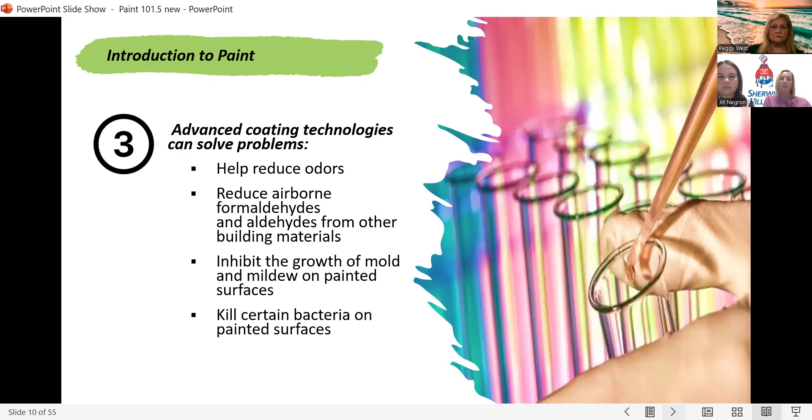So for the substrate, some examples of different substrates are gypsum board, wood, concrete, CMU, ferrous metal, as well as aluminum. And then we want to know what condition it's in. Maybe it's new metal, or it's new drywall, or if it's been previously painted. Sometimes it's in rusted condition, or it's in great condition and you just want to change the color.

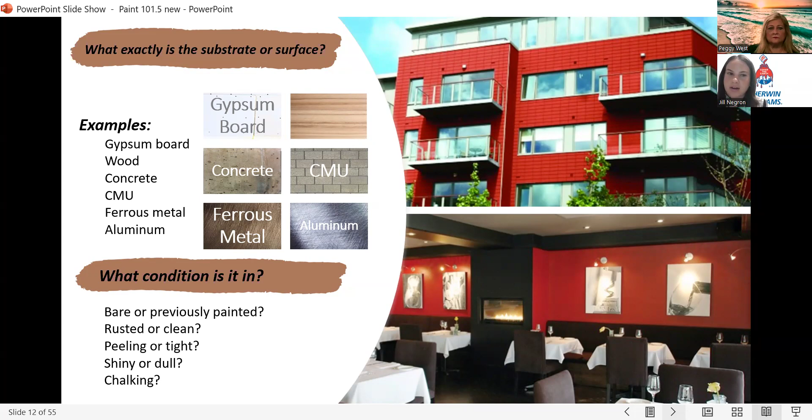If it's peeling, if it has a shine to it, or if it's chalking—when you take your hand to the surface and wipe it, if you get paint on your hand and get that chalky film, then you would need additional surface prep.

So when it comes to surface prep, you want to make sure it's in sound condition. The surface must be solid and not degrading in any way, and all contaminants must be removed. That's when you're cleaning the surface, pressure washing, making sure you're removing any dirt, dust, or anything that may be on the surface.

You want to make sure it's completely dry. So once you pressure wash, you need to give yourself enough time for the surface to dry completely. And then it needs to be dull—a lot of times when you're repainting, if there's a sheen on the walls, or maybe you're doing cabinets with a glossy sheen, you're going to have to sand and get the surface ready to make sure that paint will adhere properly.

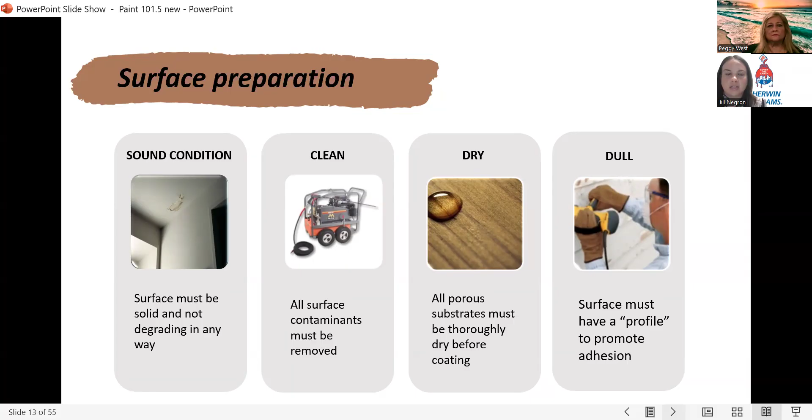When it comes to the paint system, we want to know exactly what your expectations are. A lot of times we want the paint to be washable, durable. Maybe color and gloss retention are most important, chemical resistance, as well as corrosion protection. We also have products that are zero VOCs, so if you have anything that needs to be regulated for building certificates, we do have those products available as well.

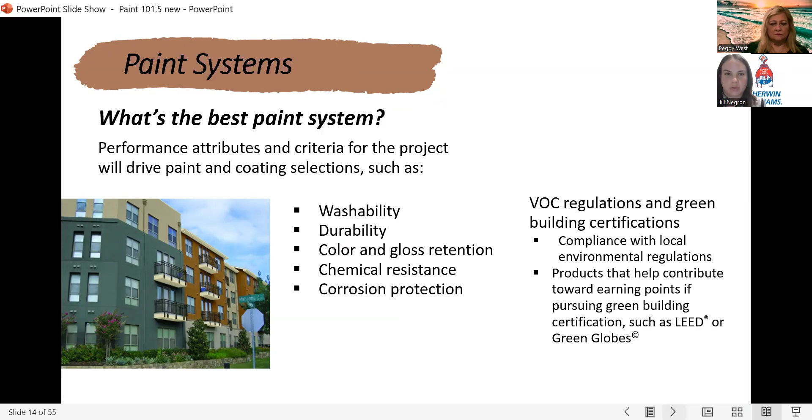When it comes to film thickness, this is the most important thing when you're painting. Too thin of a film may provide inadequate protection, but if you apply the paint too thick, it might not cure properly. Each paint that we sell has a data page, and on the data page it'll show what mil thickness is needed for that product.

The way that we measure that is through a mil gauge, which you see on the right-hand side. Each mil is 1/1000th of an inch, and we can measure it with this mil gauge. So when the project is going on, we come out and do site visits, and we want to make sure that the paint is being applied at the right millage.

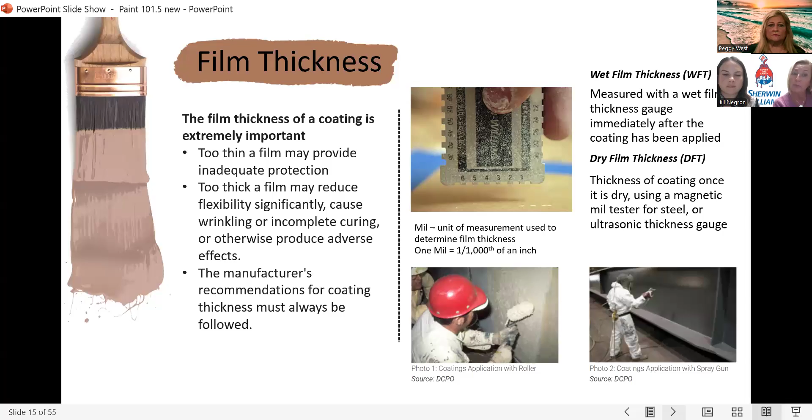For instance, in the field, if you're going to be waterproofing a building, a waterproof elastomeric coating goes on much thicker than a traditional coating. That's where these mil gauges come in, along with the specific points on the data page for that product, because each product has its own characteristics and thickness requirements for the expectations of the coating.

So you've got your different paint systems. Primers are the foundation of any paint system. You want to consider the surface—are they interior or exterior? What kind of substrates are they going on? What kind of environmental exposure are we looking at? Is it by the beach? Is it by a heavily trafficked, traveled area?

And then what type of top coat? Because not all primers will work with all top coats. So primers are available in several different formulations that are compatible, again, with different top coats. The longevity of the paint product, the performance we're looking for—several things need to be taken into account when we're recommending a system.

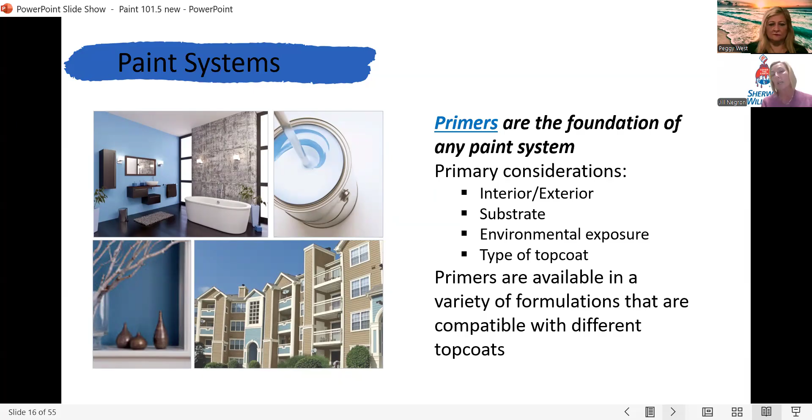So the role of a primer: number one is adhesion, corrosion resistance, sealing the surface for a uniform gloss and top coat, stain blocking, and it could also act as a surface filler.

So your key ingredients that go into paint and primer: pigments—your higher quality paints have more of the all-important prime pigments. These provide color and hide, which allow for easy application, greater durability, and better color retention. Binders—higher quality binders adhere to a surface better, provide enhanced film integrity and longer lasting performance. This makes them more resistant to cracking, blistering, and peeling.

And then you have your liquids and additives. Liquids are simply the vehicle that allows the paint to get from the can onto the surface. Top quality paints have a greater ratio of solids, pigments, and binders to the liquids. The additives are the ingredient that gives the paint a specific benefit it might not otherwise have—that's basically the characteristic, whether it be waterproofing, mold and algae resistance, or any other benefit. That's what the additive does.

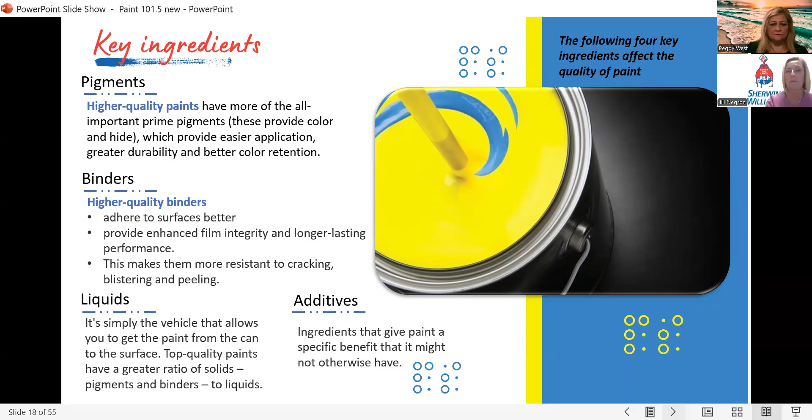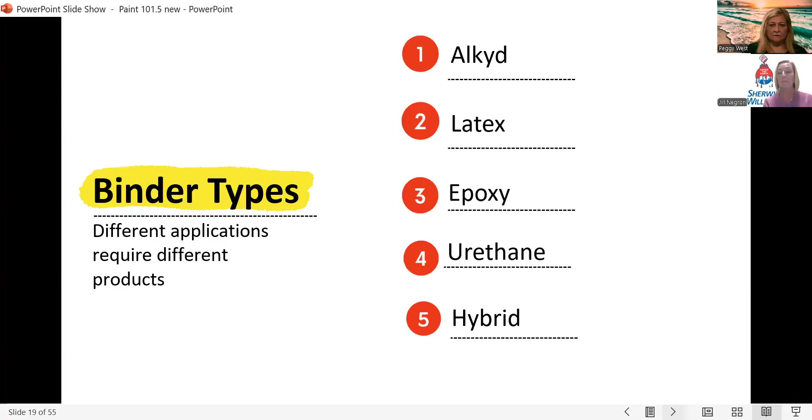So your alkyds are some of the oldest technology out there. Commonly referred to as oil-based or solvent-based, alkyds are synthetic polymers derived from petroleum or vegetable oils. It gives you a smooth, uniform finish, good flow and leveling, surface tolerance, strong adhesion, provides a hard, non-porous finish, and it's humidity resistant.

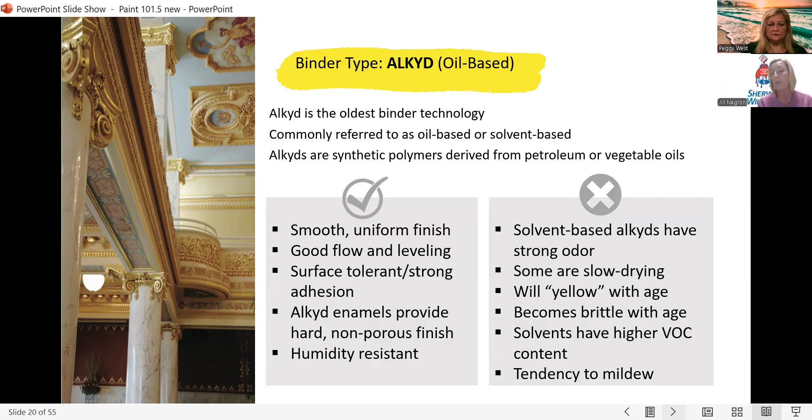The problems with alkyds is it has a very strong odor. Some are very slow drying, so we don't like to use them by the beach or where there's water. They will yellow and become brittle over time. And solvents have a high VOC, meaning volatile organic compounds, and they tend to retain and hold mildew more easily.

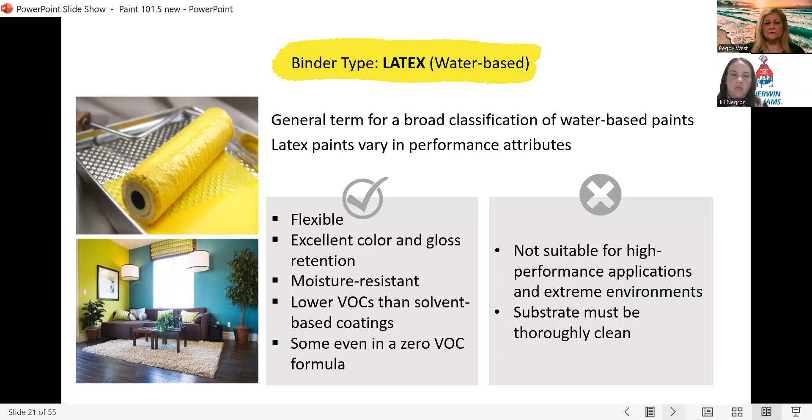Alrighty, so latex. These are our general water-based paints that we see every day and use in our houses. Latex paints are flexible. They have excellent color and gloss retention. They're moisture resistant, way lower in VOCs than solvent-based coatings, and they even come in a 0 VOC option. The downsides of using a latex paint is it's not suitable for high performance applications, and the substrate needs to be very clean in order to apply the paint.

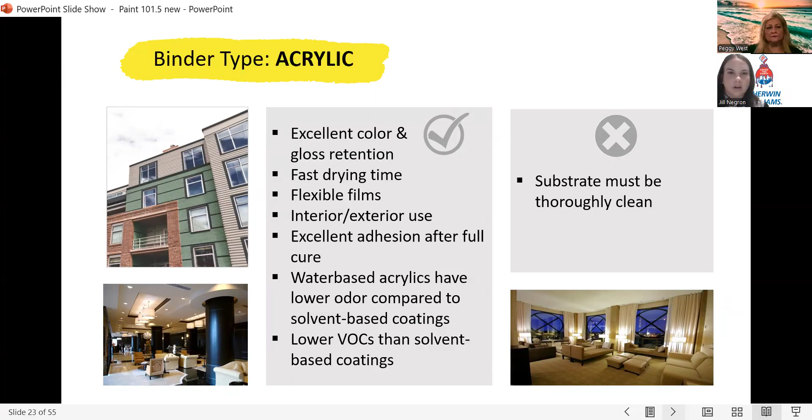Our acrylics are basically our higher end latex paints. They're more durable than a regular latex, but still water-based. They have excellent color and gloss retention, dry very quickly, and are flexible. You can use them both inside and outside. They have excellent adhesion once fully cured, low odor, and lower VOCs. The downside is that the surface also needs to be very clean in order for an acrylic to be applied.

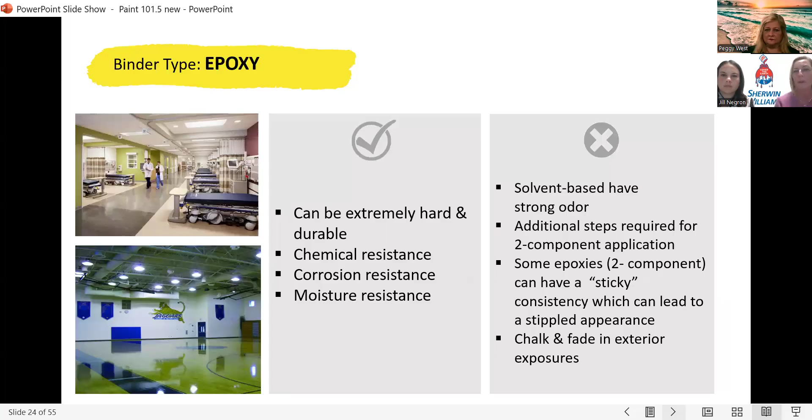So in the property management industry, this would most likely go into a gym, possibly a daycare center, somewhere you need a lot of durability on the floor, but nothing where UV or sun is going to be exposed. Alrighty, and then we have our urethanes.

I would say we don't also see these a ton in the HOA and property world. A lot of times we see them on properties with a playground or kids jungle gym. Urethanes are flexible, have excellent color and gloss retention, so if you're using a bright color, they're moisture resistant. They're lower in VOCs than solvent-based coatings, some are 0 VOC, but there's limited sheen options, so a lot of times these urethanes come in more of a glossy finish.

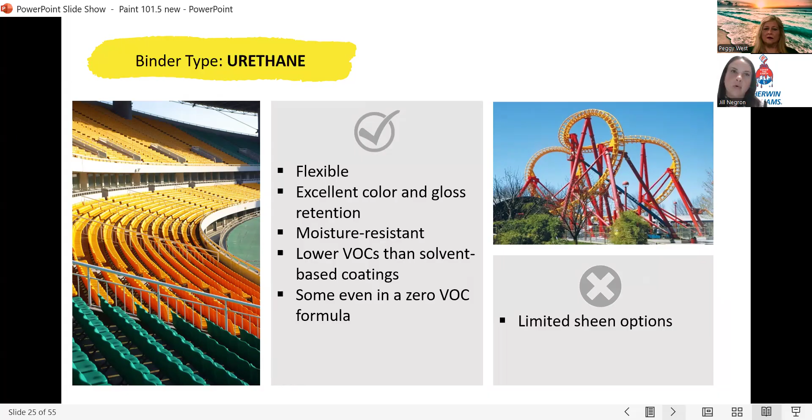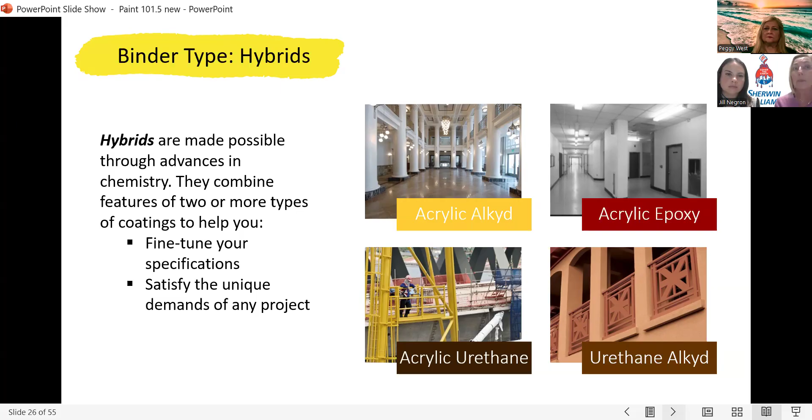Okay, and then you have your hybrids. Your hybrids are some of the newer technology that's been out, probably in the last 10 years. They are made possible through advances in chemistry. They combine features of 2 or more types of coatings to help you fine-tune your specifications and satisfy a unique demand of any project. So you have your acrylic alkyds, your acrylic epoxies, your acrylic urethanes, and your urethane alkyds.

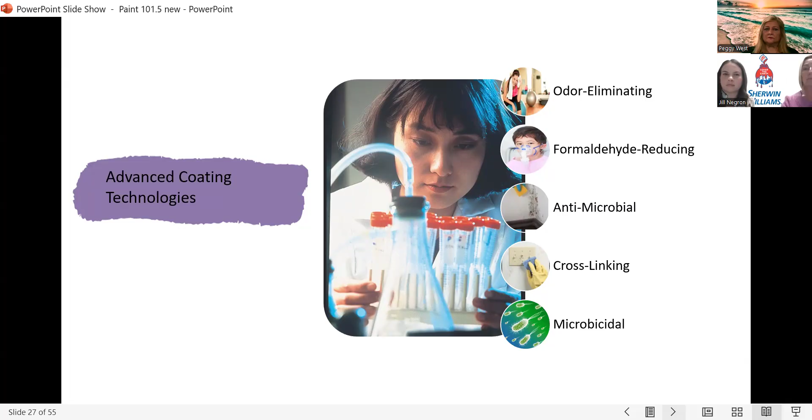Okay, so with odor eliminating technology, sometimes you have unpleasant odors that might be causing a problem from a tenant that lives next door to you. Maybe you have a very well-used kitchen or a gym. You'd see a lot of these type of products used in that type of situation, maybe your social rooms in your clubhouse. It helps reduce odors from smoking, pets, cooking, any organic odors.

We like to think of it like baking soda. So if you put a box of baking soda in your refrigerator, it eliminates a smell in there. That's what this odor eliminating technology can do. Now, it doesn't last forever, depending on how well used the area is and how many odors there are. You might have to recoat it after several years, but there is not an unlimited lifespan to it.

Okay, so we have formaldehyde reducing technologies as well. As we mentioned in the beginning, your building materials have formaldehydes in them. So if you're doing a remodel in your clubhouse or social rooms, your kitchen, carpeting, flooring, wallpaper, drywall, everything has formaldehydes in it, and it can be very harmful, especially to older people, but to anybody. So there are technologies now where it can reduce that, and you can have quicker turnaround time for people entering into those rooms.

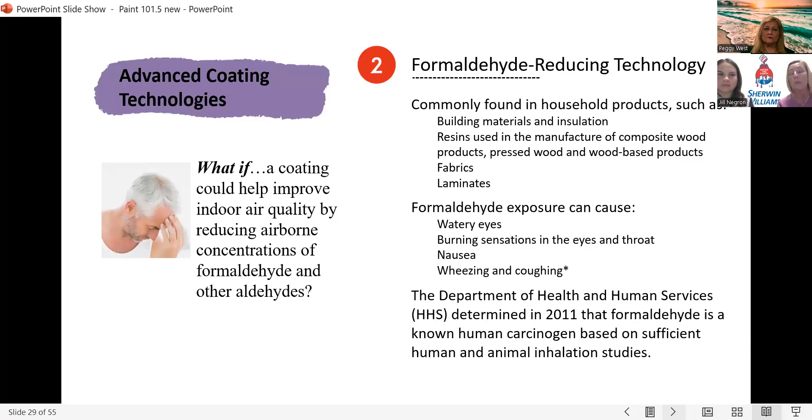And then your advanced coating technologies. Your antimicrobial technology is best when you have warm, damp, and humid conditions - bathrooms, locker rooms, saunas, spas, and sometimes even gyms.

Your cross-linking technology is something that came out quite a few years ago - one of my favorite technologies we have. This is for any kind of hallway in a major part of your property, especially common areas, where you're trying to clean surfaces after somebody nicked the wall or kicked it or hit it. Now you can take a sponge or rag and remove those stains without causing damage to the paint. In the past you'd scrub a surface and start seeing shiny spots on the wall - these technologies prevent that from happening, so you get a longer life cycle for your coatings in common areas.

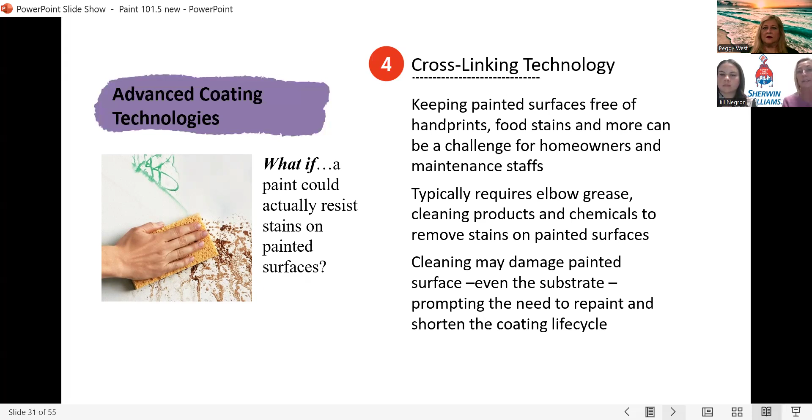Your microbicidal paints - you saw this a lot during COVID. Quite a few vendors came out with this to help with different viruses. These advanced coating technologies help prevent the spread of bacteria such as staph and MRSA on painted surfaces. This doesn't have an infinite life cycle - if it's in a busy area we want to recoat maybe every couple of years, but it does help kill harmful bacteria, similar to the baking soda technology we mentioned.

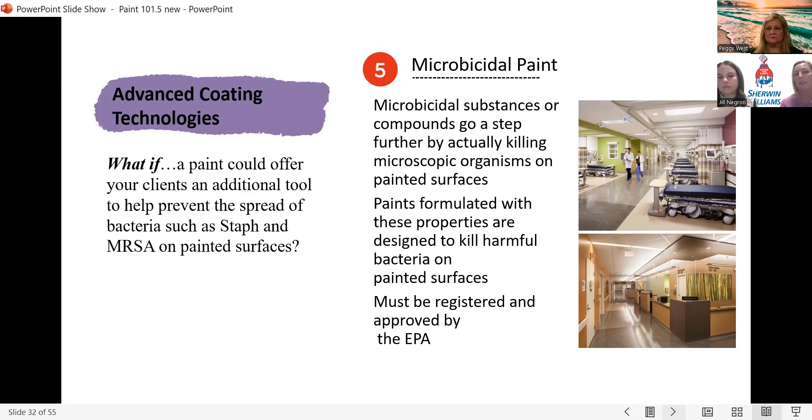Now we're going to get into gloss and sheen. When you repaint, you have the option of what sheen to choose. Flat or matte creates no to very low reflectance when dry. The benefit of a flat finish is it hides surface imperfections, but it's not as washable as satin, eggshell, or semi-gloss.

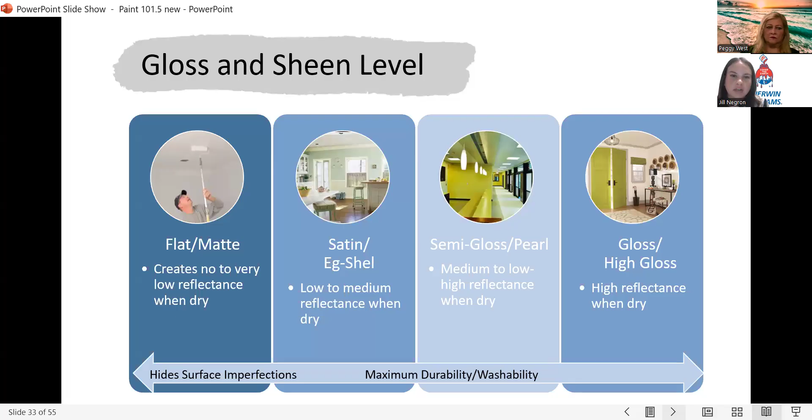Satin and eggshell have low to medium reflectance when dry, and that's when you start getting more washability. Semi-gloss is even more washable - we really only see semi-gloss in kitchens, bathrooms, areas you'll wash more frequently. We also have gloss, which you see more on cabinets, doors, and trim areas that get used more frequently. So flat hides surface imperfections, and as the sheen goes up, it becomes more washable.

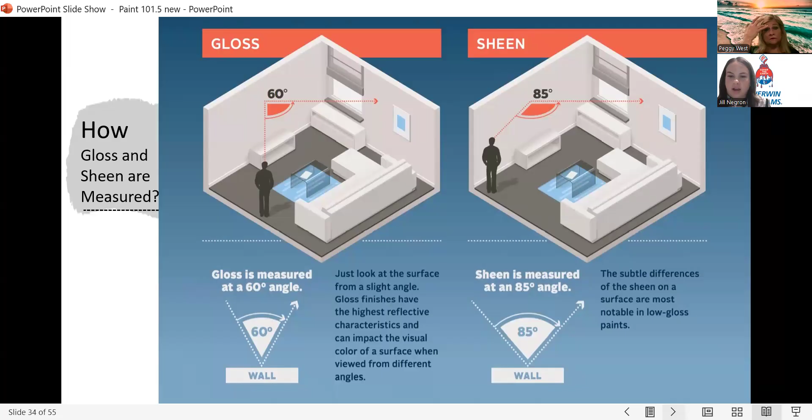This slide shows how to measure gloss and sheen. Gloss is measured at a 60-degree angle, and sheen is measured at an 85-degree angle. This is an example showing the difference between flat and satin - flat does appear darker than satin. Flat is on the left, number 2, and satin is number 1.

If you're doing a lot of stucco repairs, maybe restoration work where you're not redoing all of the stucco but only certain areas, you might want to consider a flat finish because it's hard to match the stucco texture 100%. The flat finish helps hide those imperfections.

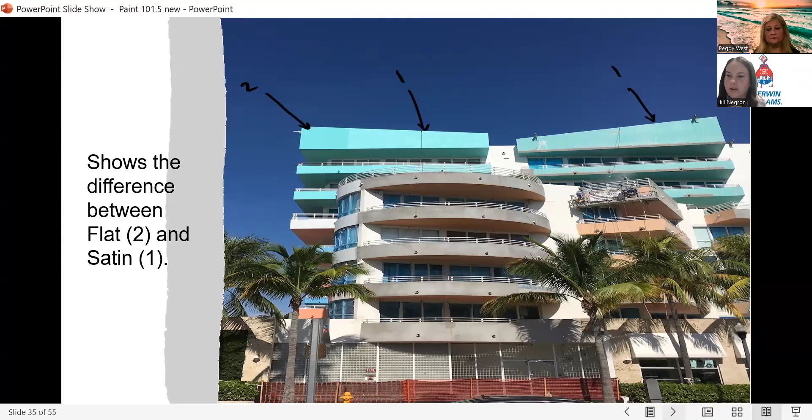We also have environmental considerations. If you need certifications like Green Globes, LEED, or any third-party certifications, we offer those as well within our paints.

When it comes to budget, for a whole repaint project, labor is about 80% and paint is about 20% of the project. When you're getting multiple bids, the paint generally falls within a certain range, so labor is going to play the biggest part in why one bid might be higher than another.

Some contractors have all their equipment, lifts, booms, scaffolding, and some have to rent it. That's when you're going to start to see a different price in labor.

This is a breakdown of a traditional paint job versus an advanced coating. As you can see, the paint is about 40% higher with an advanced coating, say between an 8-year product or a 10-year self-cleaning product. It's generally about a 40% increase in paint, but across the whole project it's only a $6,000 difference. Over time you're getting an extra 2-year warranty, but over 10 years, $6,000 isn't a huge difference. It's always something to take into account when you're doing a major repaint.

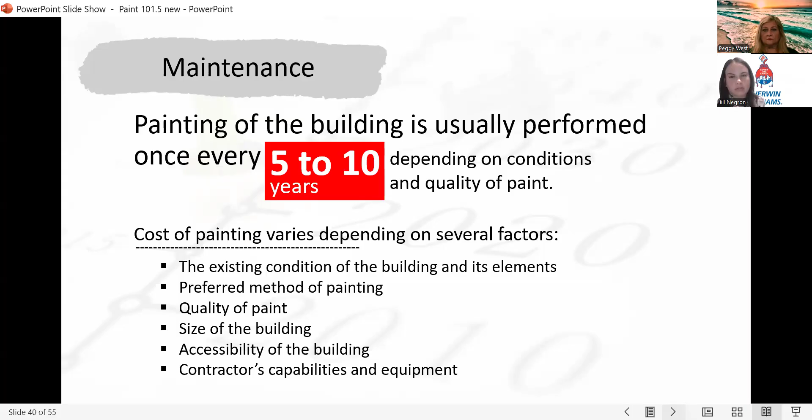To help with maintenance, the most important thing is doing visual inspections to look for any paint failures and correct them as soon as you come across any signs of damage on the building - whether it's water intrusion, paint bubbling, peeling, or areas where the paint's not adhering properly. You can contact your paint manufacturer to help assess any areas. We're always happy to come out and walk the property, see if there are any areas of concern, so we can make proper recommendations on surface prep and the proper coatings.

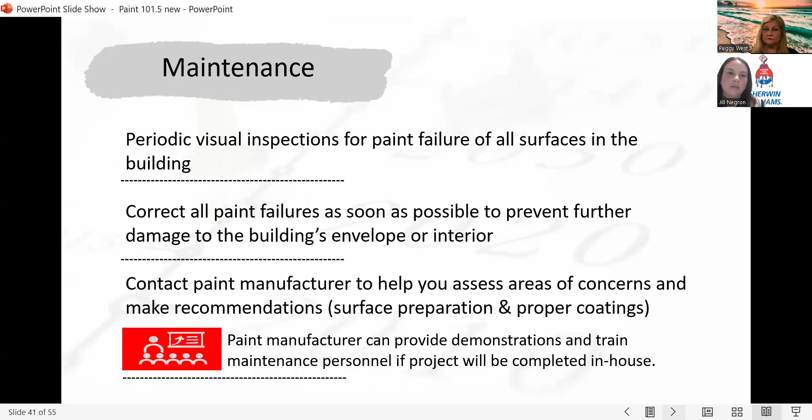Now let's talk about specifications. Having a written scope of work is so critical before engaging in any painter's pricing work for your building. This ensures the correct remedial work is completed before any painting project commences. We'll specify the correct product to ensure the maximum warranty, and it makes the decision easier for the committee to select a successful painting company, as everyone has priced the same scope of work. Having a specification prior to the project starting is one of the things I stress the most, because without it, not everybody bids apples to apples - you get several different products, several different methods, and then you're confused as to why labor prices are so far apart.

So key points to include in your specification: make sure your contact details are correct, the property details, and the preferred time frame for when the project will commence. The surfaces to be included and excluded are very important - do we have stucco, concrete, cement, wood, metal? What's out there, what do we want to consider? Commonly overlooked exterior surfaces include siding, roofs, gutters, fences, gates, garages, doors, and windows.

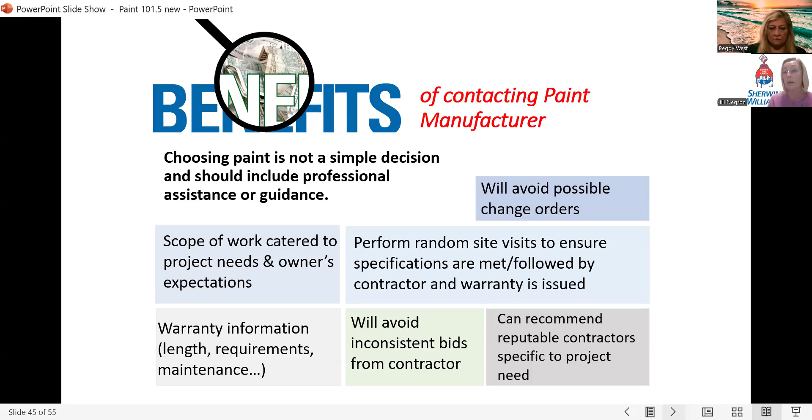Alrighty, so the next thing is prevent. So we want to make sure we're preventing any issues with the paint. One of the most common and costly issues that we run into is to fix leaks. So we want to identify any leak sources and look for signs of water intrusion. So we're going to go through a couple areas that you can look for on your properties.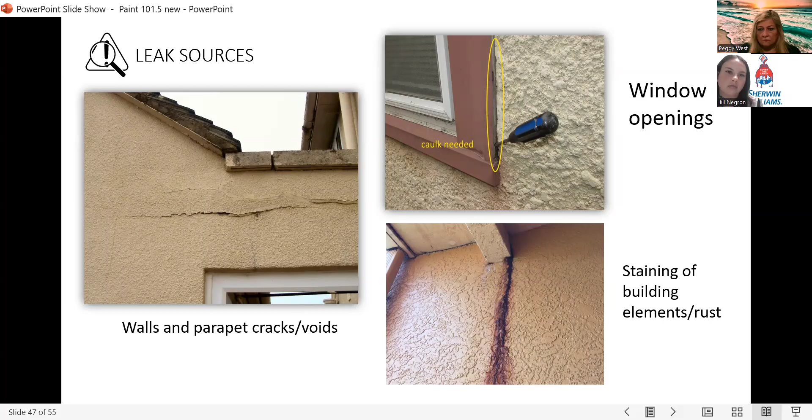Same thing here, you have a structural crack. It does look pretty large, so you want to make sure you're reaching out to an engineer to see why that's happening.

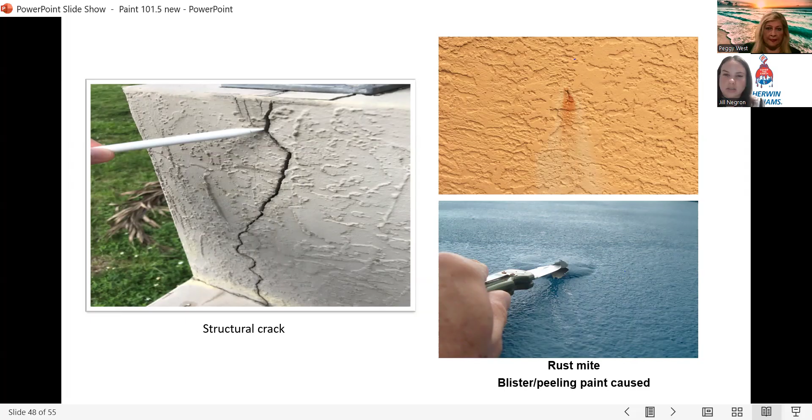Right here, there's an open void on the parapet walls, so you want to make sure you're patching those areas. Voids can be found anywhere that are cracked, damaged corner beads, or in the stucco. Any area that's exposed like that needs to be patched to avoid any water intrusion coming into the building.

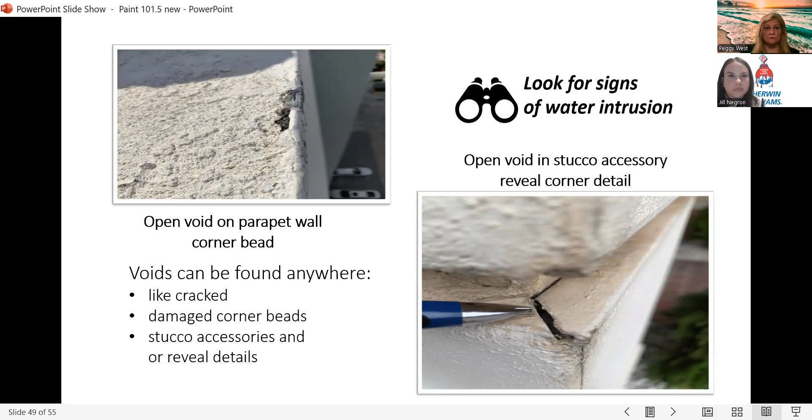So some key takeaways: primers are the foundation of any paint system, playing an important role in the coating performance and longevity. Advanced coating technologies provide unique benefits that can help reduce odors, reduce formaldehyde emissions from other building materials, and inhibit the growth of mold on painted surfaces, resist stains, kill disease-causing bacteria on painted surfaces, and having a scope of work is the most important thing when you're starting a new project.

So reach out to your paint vendor. We want to make sure you have the scope of work to help you make the paint process as easy as possible.

So this is some of our complimentary services that we offer to all of our properties that we work with. We come out, we evaluate the property, we prepare the scope of work, and we offer pre-bid meeting assistance.

Once the property manager or the board of directors approves the scope of work, if you have contractors you want us to send it out to, or if you need our recommended contractor list, we can invite them to a pre-bid meeting. We'll make sure all of the contractors are comfortable bidding on the project, and if anyone has any questions, we're in a group setting and the board or property manager can answer those questions.

We also help with the color selection process. Like Jill said, we do renderings, and we also offer in-person color consultations.

Ongoing project help, so we'll be there throughout the entire project, making sure we're doing our site visits. We offer these continuing education classes all the time, so if anyone has a management company or needs additional credits, we're happy to schedule an additional CEU class.